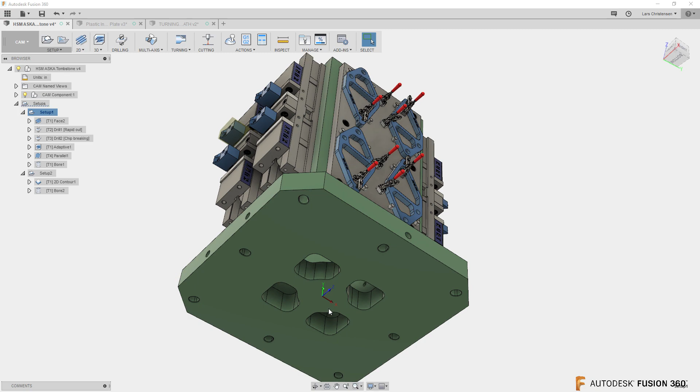The way I programmed this one, if you're not familiar with it, you didn't see the live stream, is I have a setup - you should always have a setup - but notice my setup is sitting down here right at the center of rotation, and on a horizontal machine your Y is up, and your X and Z are pointing in the Z direction toward your 0 side on a horizontal machine. This is actually the way I used to program my horizontal machining centers - well, not mine, but when I worked at a manufacturing facility in Rochester. It just makes it a lot easier to have your G54 sitting right in the center of rotation.

Of course, it comes with the caveat that everything on the tombstones has to be right in place. But that's one of the great things about having something like Fusion, where you can model everything up. So the way it works...

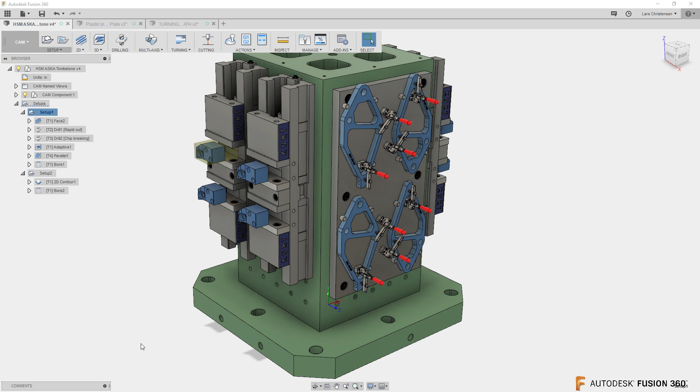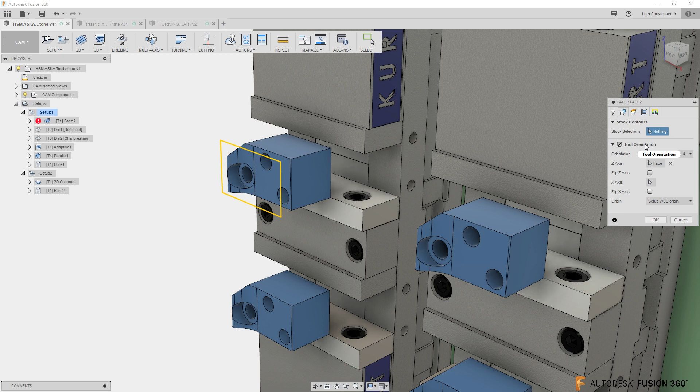You have one G54 sitting at center rotation, but then with this new tool orientation - we've had this for milling and drilling, so that's not new. That's actually how, if you go in and look here, I programmed one part, you'll see there's a facing operation. If you right click on that facing operation and go to the geometry tab, you will see the tool orientation is turned on. Same thing if I go to an adaptive to rough it out, edit, go to geometry tab, tool orientation - that's how you control which side of the tombstone you're going to be machining on. So we can now do that for probing.

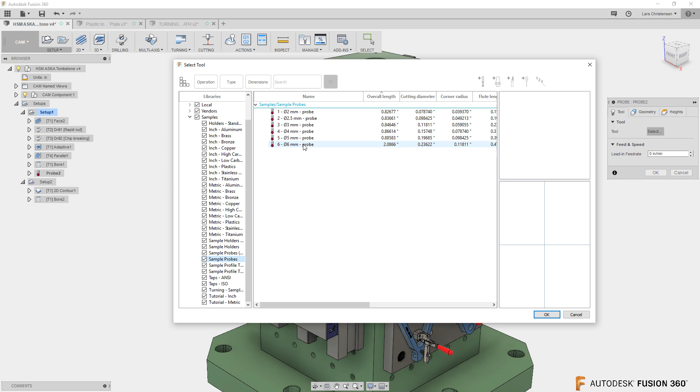So go into probing, select a probe, and I'm just going to go down here and select the one out of the library here, out of the metric library. Select that one, go to your geometry tab, turn on tool orientation, and that will give you the triad down here, right, for your work coordinate system.

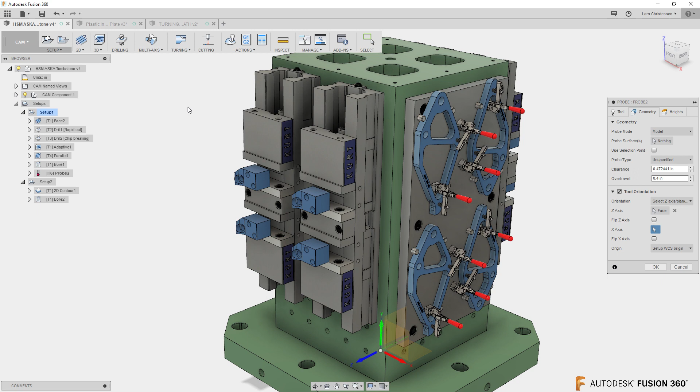And then you can just go up and use it just like you would do, select this face, and now you will see that the z-axis had flipped to this as its 0 side, or whatever side you want to call it. And now I can go in and select the faces that I want to probe, hit OK. Probing normally comes first. In case you didn't know that, you can actually drag operations in here also inside of CAM.

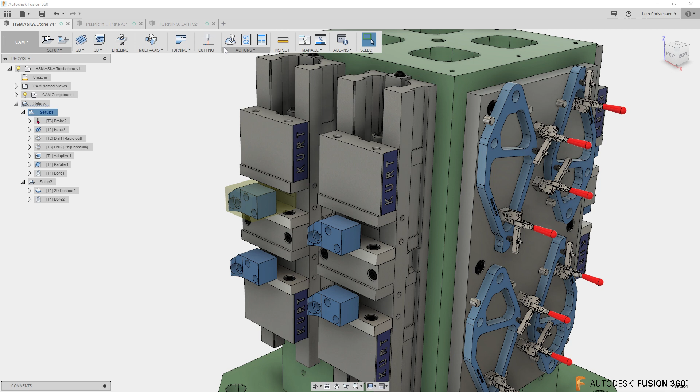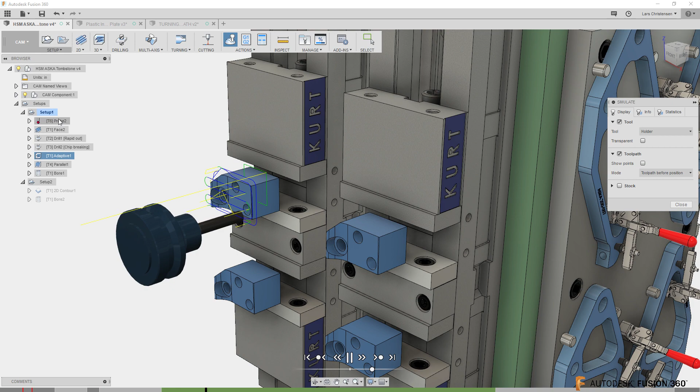So if I go in to simulate this now, hit the simulate button, slow it down a little bit. You can see now the probing cycle will come in here and probe the part and set the G54. We have done live streams on the whole setting G54 with the probing before, so I'm not going to go that deep into that. But that's how you would use that function. So either on a fourth or on a fifth axis machine, you can now use that probe to go in and do that.

Cool. The next thing, let's get over to this model here we've been using for a couple of these What's News. The next thing I want to show you is adaptive clearing. They added what is called both ways for this.

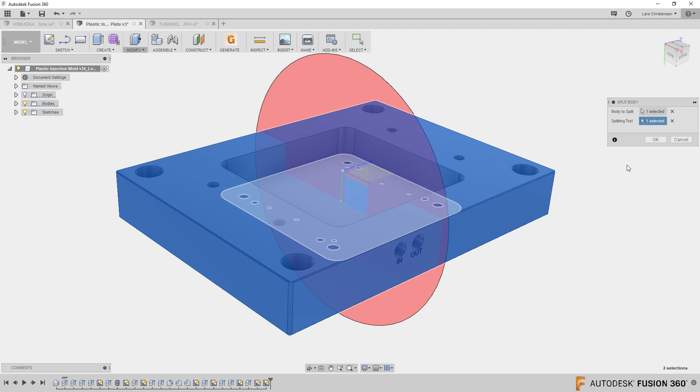But to show it, I'm actually going to do something else. I'm going to be in the model environment. I just thought I would show you this. How do you chop a part in half? Well, if you go into modify, you go into split body, and you select the body, and then you go down to splitting tool. You can actually select the plane, do that, and then you can hide the body. I want the other body. That body. And you just chop the part in half. How about that? So let's talk about CAM.

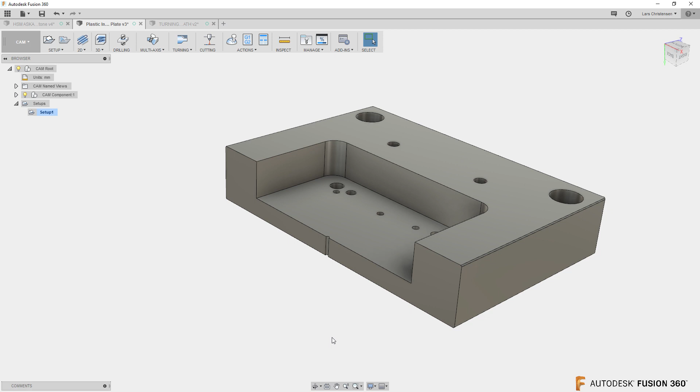Go into the CAM. Let's do a setup. We'll flip it the other way. Doesn't really matter. So in the adaptive, see, I wanted to show this open. So if we go in, and this works both for 2D adaptive and 3D adaptive. If you go into adaptive clearing, and I'm just going to go in and select the standard.

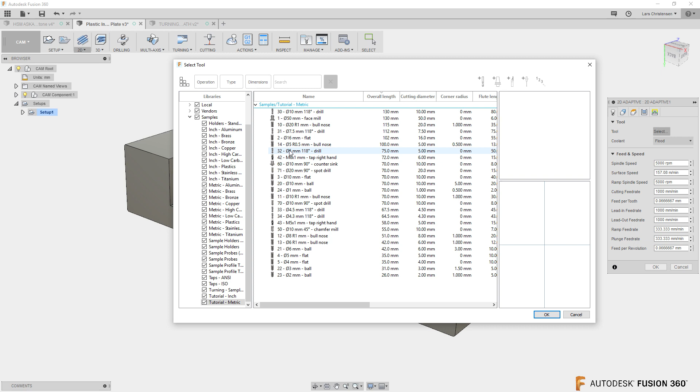Wow, metric. Something got moved up and down on all my tools. Where is it? 16 millimeters. There you go. 16 millimeter flat, the big rougher in here with the extremely long flute length. Doesn't matter. Couple of things.

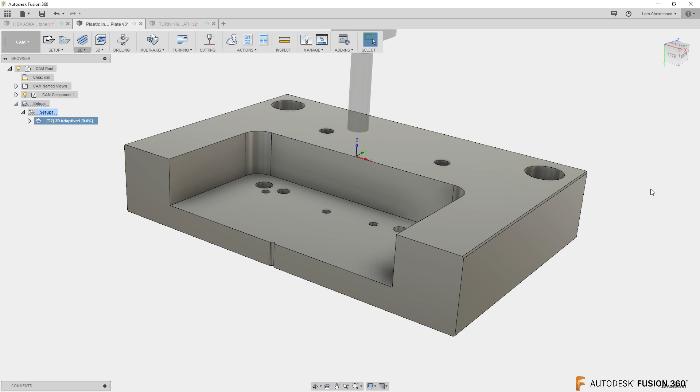When you pick adaptive, make it a habit of selecting the edge and not the face. And the reason for that is if you're selecting the face, then that's what it tries to machine. If I go ahead and hit OK here, it will do adaptive on that face. And you will actually see that it does a couple of weird swirls here because we have some holes in it. So make sure when you do adaptive that you always, unless you're doing a facing with it, select an edge.

Then you will see that you get what you want, really, in there. And then it also knows that it's got to start from the outside. Before I get into the back and forth here, one thing you will see here, if I go ahead and simulate this right now, the cutter will come down, it will climb mill, lift up, come over, and it will climb mill again.

Now, we talked about adaptive multiple times in the live streams. It is absolutely the best way to remove material inside of Fusion. What the software does in the background is that it calculates, it knows what the stock is, it knows the boundaries you're going to machine, and it will keep a constant cutting width on that cutter under every circumstance. So not only can you remove a lot of material, but it will also save your cutter life.

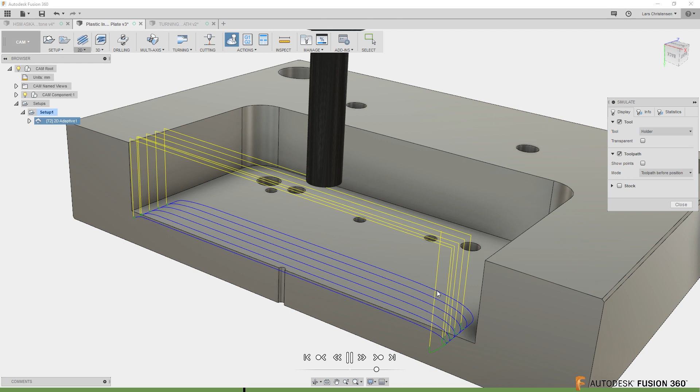Now, the reason I just quickly want to show this is so climb milling in CNC milling is kind of like just the golden rule, versus if you ever do like Bridgeport, like standard milling where you are cranking the handle, we normally go conventional, and this is how the cutter is spinning around.

Now, one of the comments that I get from people is that it's all great, you know, climb milling is the way, but look how the cutter lifts up every time. That's a lot of rapid moves to move up. And I will tell you that I did a lot of production machining back in the day, and yes, rapid moves cost a lot of money. I know that if you're just machining a couple of parts, then a little bit of rapid move doesn't really matter. But if you're doing production, then rapid moves are critical. So this is where this whole thing comes in.

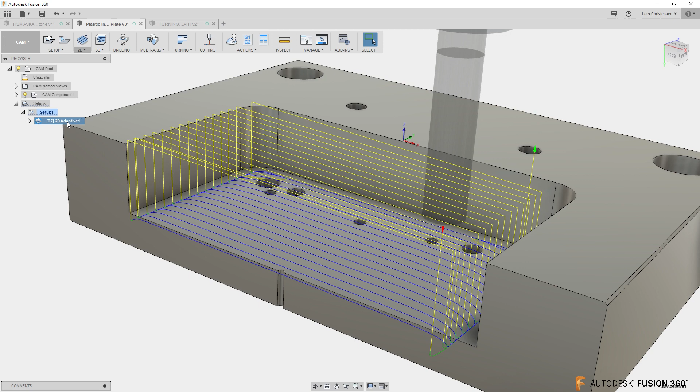But before we get to the going back and forth, I want to show you how you eliminate those high lifts, because many times people ask me that. Right click and go into the operation. Go into your linking tab. That's the last tab. That has everything to do with what the cutter is going to do between when it's engaged in material and rapiding to the next cut. And what I normally do in here is there's really three things I change.

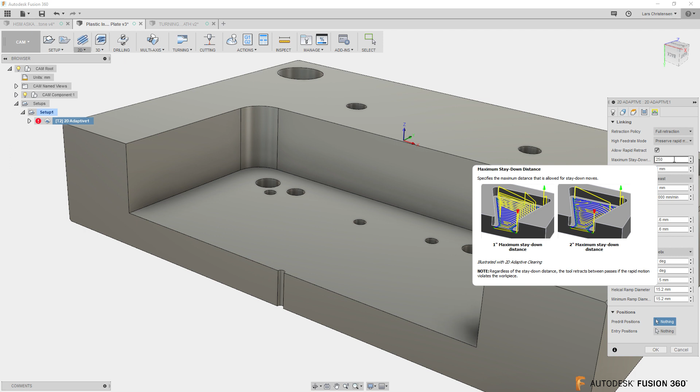Set the maximum stay down to a higher value, and this I think can be a little confusing, but you know, they put some good help menus here. If you hover over it, it comes up on the screen. So the bigger you make this distance, you're telling the software that it can stay down. So if you make this 250 millimeters instead of 80 millimeters, then if I hit OK, you will now see that we don't get any of those rapid moves.

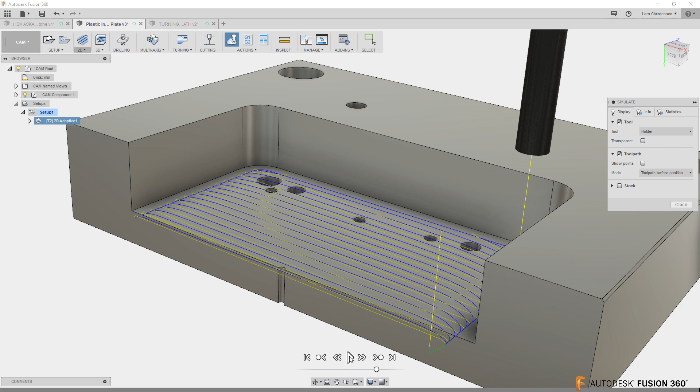Now, another thing I normally change in here is I normally add a little bit of lift height, because you normally want the cutter to go up just a little bit, right? You don't want it to drag around the floor. And now when I simulate this, you will see that it's still climb milling, but it will lift up 2 millimeters, then it will go down again and lift up 2 millimeters. You can kind of see if I zoom in, that area there is where the cutter is going to lift up to that 2 millimeters. So here it comes. And it's going to lift up 2 millimeters and go back there again.

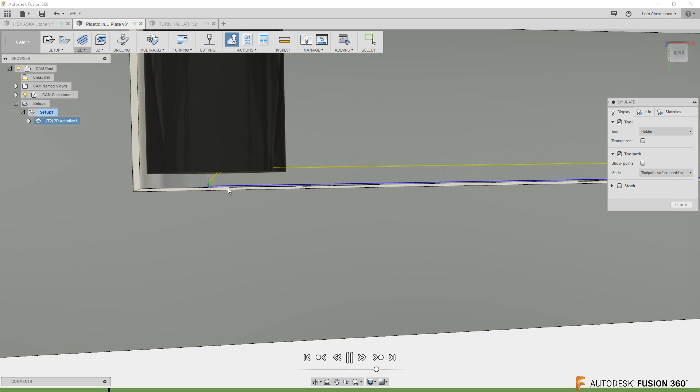So I hope this adds a little bit of value to somebody out there. Okay, so this was not new. What they have added is an option where in the passes tab, you can now say you want to go both ways. But notice, this whole adaptive clearing is controlled by this optimal load. So this is how thick of a side milling chip your machine can take. And this depends on what type of machine you have. So it's not like one golden rule. So just be kind of aware of that.

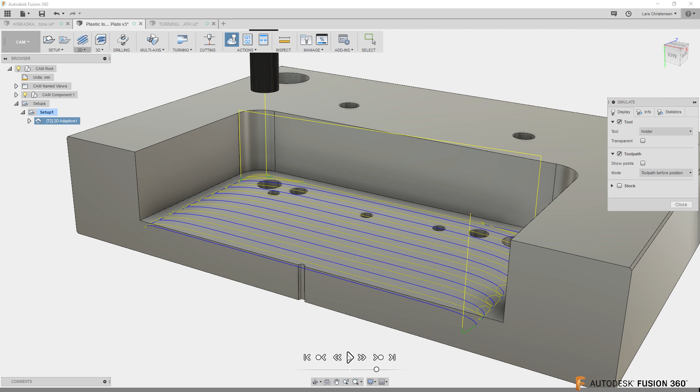But what I want to show you is if I check this both ways, I get another one. So I get an optimal load here, and you get an optimal load the other way. Because what the software is going to do now is it actually is going to climb and conventional mill. So it's going to climb, that's all great. Conventional milling. Climb, conventional milling, okay? So now you're getting that force.

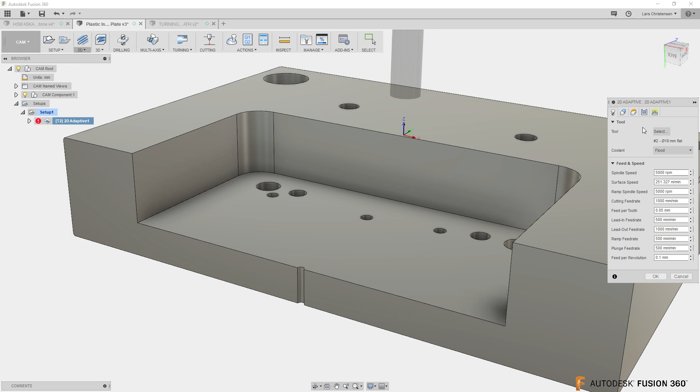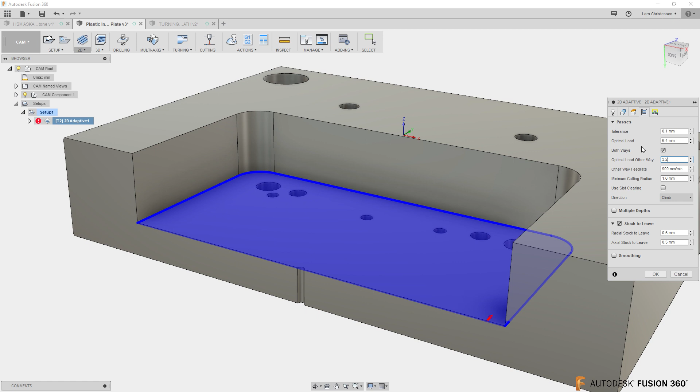But if you're machining like steel, you definitely can test it out. It depends on how hard your material is, but I would definitely think that your conventional milling has to be quite a bit lower. So you cannot take the same amount conventional as you can climbing, and you can hear it for sure as you're going back and forth. I personally would probably start out with something like half of that, and then play around with it. But if you've got to remove a lot of material, like in 6061 aluminum, this function here will definitely save you some time.

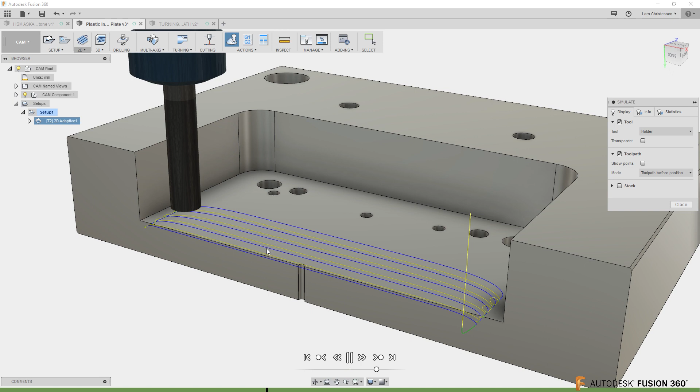And I would also think that, especially if you're doing something like 6061, you will find the cutter is going to last pretty good. Definitely if you're doing roughing. This is just one of these add-ons from the development team that is productivity, right? And something that I think is absolutely awesome. So this was a good one that they worked on for this.

Another thing that I'm a huge fan of is a couple of things they did to the tool library.

So I'm going to the tool library now. The tool library has gotten quite a few updates. Let's see if there's one. This one has a little bit more tools. They have done a good job trying to clean up and do different things in here, adding a little bit of logic to it. This time around, if you look here, we have a bunch of tools, and you can drag over here, and there's a lot of different things in here.

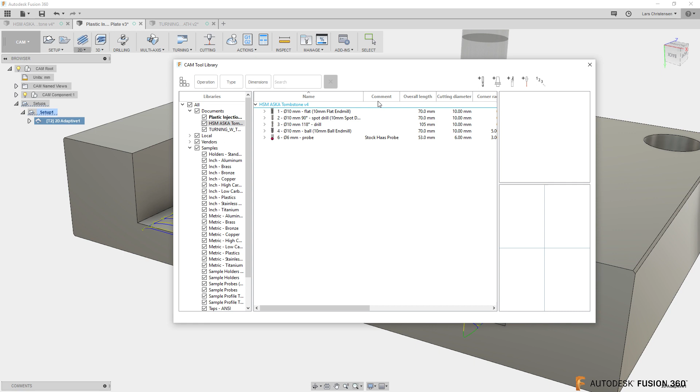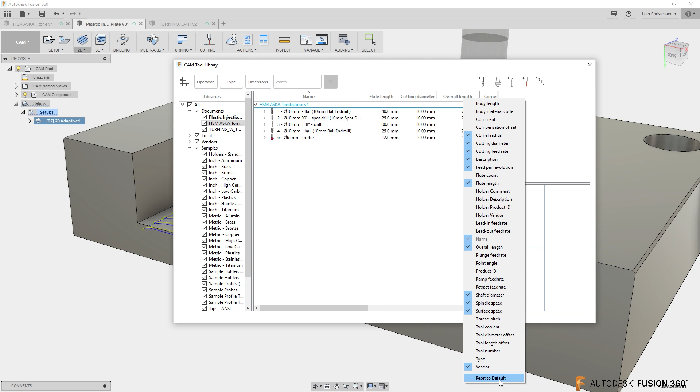So now you can turn that on, and you can also drag them and reorder them. So I would definitely have comments next to the name, and then I would have my personal comment in here on what it is. So right-click in here and you can turn things on and off, and you can also reset it to default. Then you can grab things and reorder them depending on what you want. So that was definitely another very good thing. All right.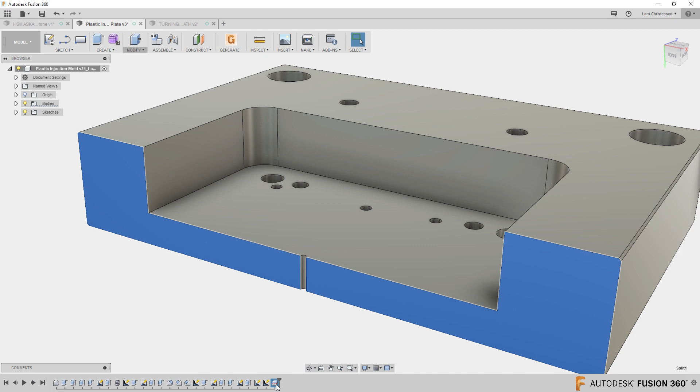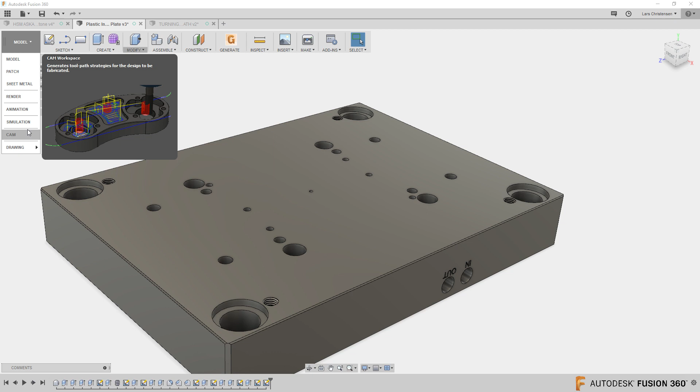Let me delete this setup for a second. Let's get back to the model environment, and let me undo what I did with splitting this one apart here. Okay. The other thing that they worked on was holes and hole drilling, and it's actually kind of funny because I just had a guy give me a note that whenever I'm doing something in CAM and I get to drilling, I always rush over it, and I should stop doing that. And he's right. The funny thing is, I used to do a lot of hole drilling, and it used to be one of those things that I always played around with.

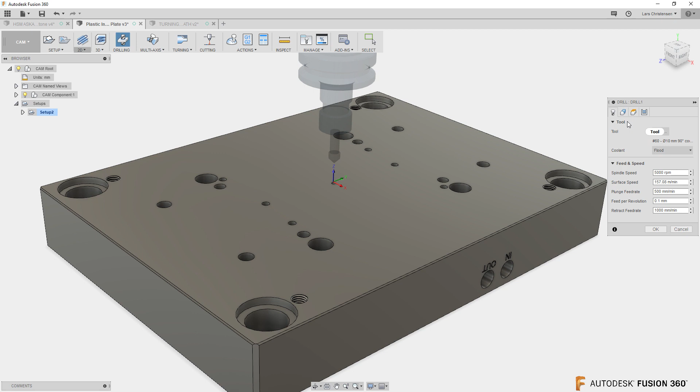So let me do a new setup here, and let's talk about the drilling. I think my tendency is because holes are boring, but if you're drilling a lot of them, they are not. They did some really good enhancements in here. So let's go ahead and do a drilling. I'm just going to select a tool. Countersink will be fine. This interface got some really nice stuff.

First off, let's select a hole. Select the face here, and we can do select same diameter. Click on that, and it will find all those different diameters. And you can select other faces, and they will be added in there. Now here's something pretty neat. Look down here in the lower right corner.

Well, you can't look at that because I put a logo there. Hang on. My logo is right in the way. Oh, that is a rookie mistake. I thought it was going to be all fancy with a logo down in the corner, then you can't see.

Down here, you can see that we have 10 holes selected. If I select another one, now it changes to 14. So it's pretty neat that they have added a hole count down here. I have definitely had a drawing that said drill 32 holes, and you were sitting in here selecting, and you had to count that you actually had 32 and make sure you didn't miss one. So good job there to the development team.

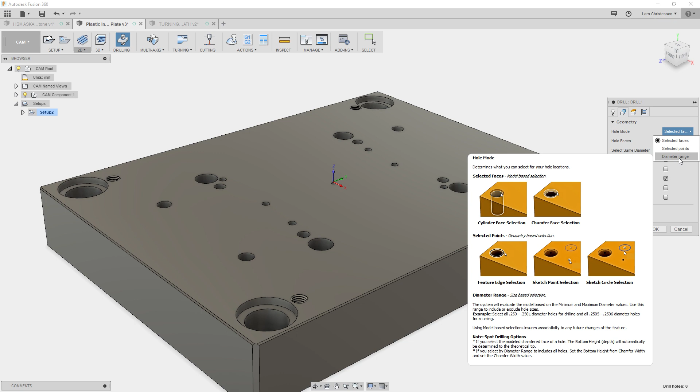Another one I really like is diameter range. When I hover over here, you get the flyout menu that Mike Matera does such a good job with. I always read these. So it's diameter range. This is brilliant. If you know the holes you've got to pick, and we're spotting right now, and you were spot drilling every hole here, you would have to go around and click all of them. Now you can just go into the diameter range and do that. I think that is absolutely awesome. The other thing that they have added in here is select by points.

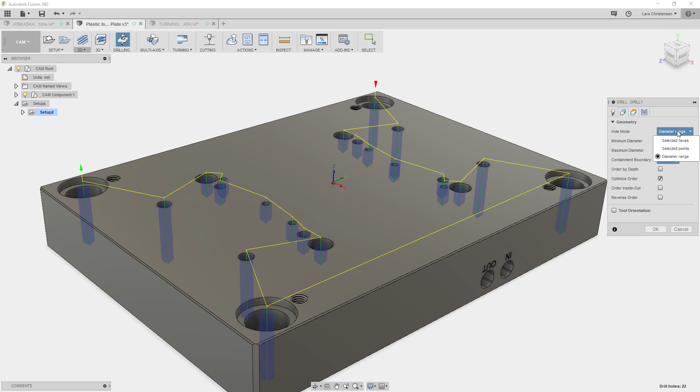Now this is not new, that you can select by points, but what I did here was, if some people have to model a lot of holes, like you get a plate that has a couple of hundred holes in it, or 500 holes or something like that, you know that all these holes can tear down on your CPU power on your computer.

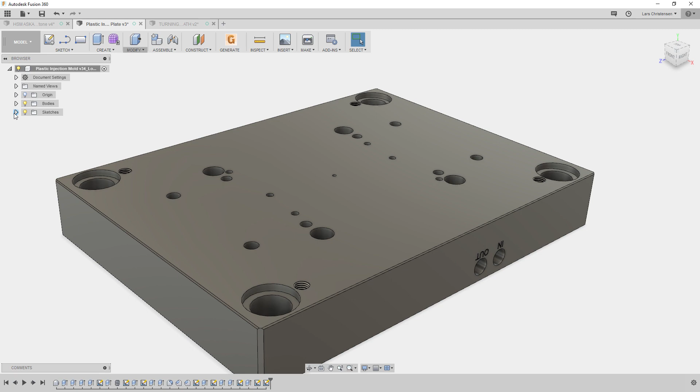So what you can do is that you can create sketches, right? So here is a bunch of sketch diameters. Now I could extrude all these down to the right depth, and there's not that many right here, but if you have a lot of holes, that can slow down your computer. So what the CAM team did was they let you now, let's go back into that drill, they let you now use the select points.

And if I select one of these diameters, I can still use select same diameter. So now the algorithm is done in here. It's absolutely brilliant that by selecting a point, it even knows the sketch diameter, and you can now select all those. So there's some people who are going to be really happy about that.

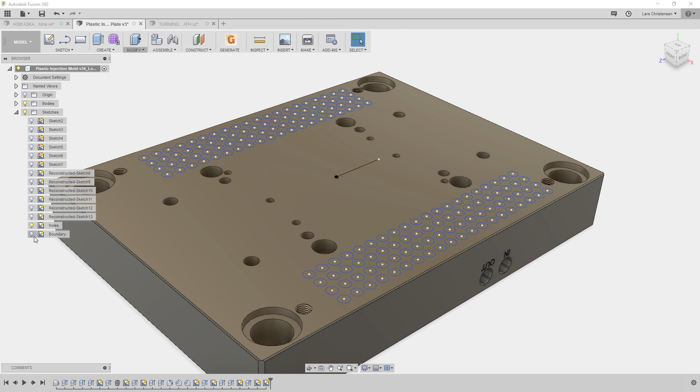Now another thing that they have added in is that you can now use a boundary. Let me go back to our model here. I used a sketch. It doesn't have to be a sketch. I just created a rectangle, right? A sketch rectangle, but it could be a pocket or something like that. But what is really great about this, especially if you have big plates where you can't reach all the holes. We've all tried this, where we can only reach half of the part.

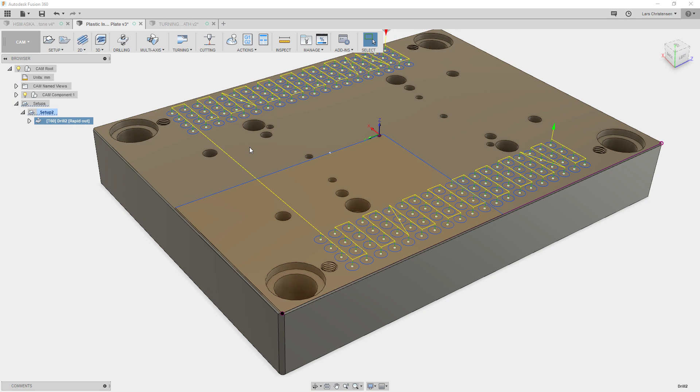You could cut it in half like I did in the beginning, but of course the CAM team, those developers, added a containment boundary right here. So I can click on that, I can select my edge, and now you will see it only selected the holes within that. That is really awesome.

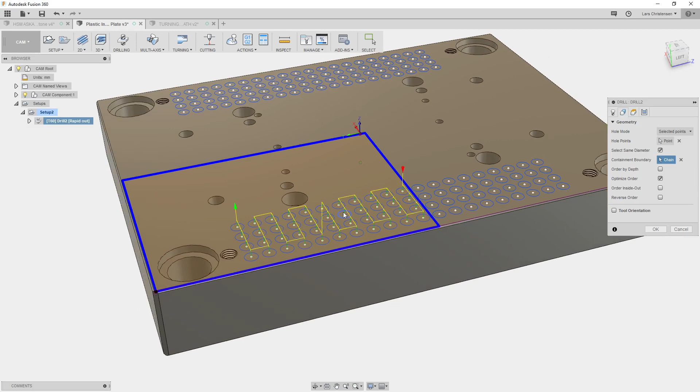Another thing that I believe was in the last release that I talked about, but now I'm in here. Also remember that you can now sort the holes by depth. So you actually can now select different depth and control all that. There's also now a reverse order in here. You can check that, and you're now reversing the order that you are going in. That can be extremely nice.

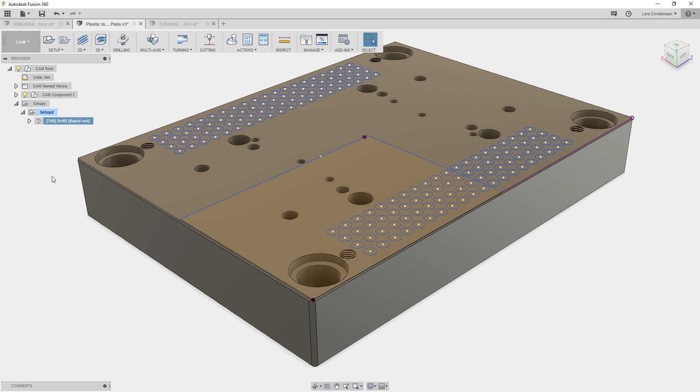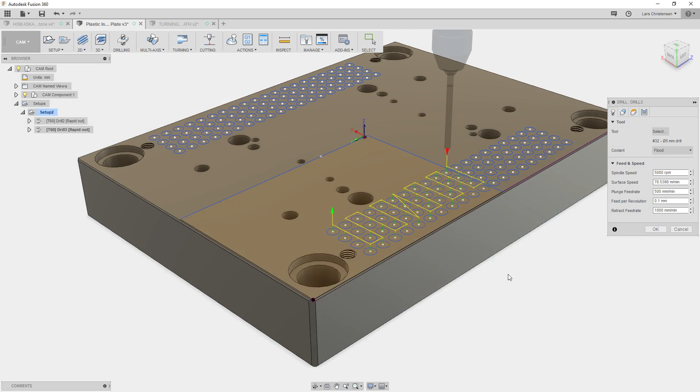If we right now are spot drilling all these holes, and now we actually want to go ahead and drill them, then we can right click and say we want to do a create derived drilling operation. Select a drill instead of the spot drill, right? I don't know what size these holes are. And then you could go into here. Now you could reverse the order if you had that option.

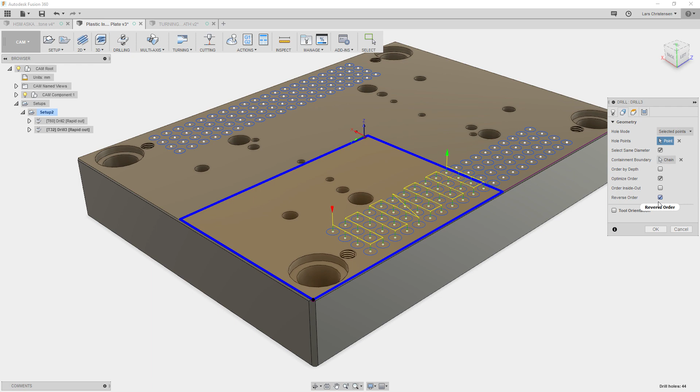It kind of depends. I mean, that could be great depending on how your machine handles tool changes. Some machines, the head's got to move up to get to the tool change, but other machines you actually don't have to do that. So this little reverse order here is absolutely awesome. So the drilling function here got some pretty cool features with this hole diameter range. You can select these points, the selected diameter in there. Yeah, so really good job on that to those guys.

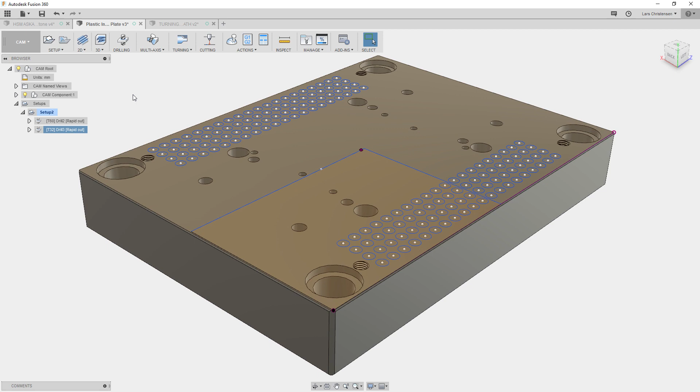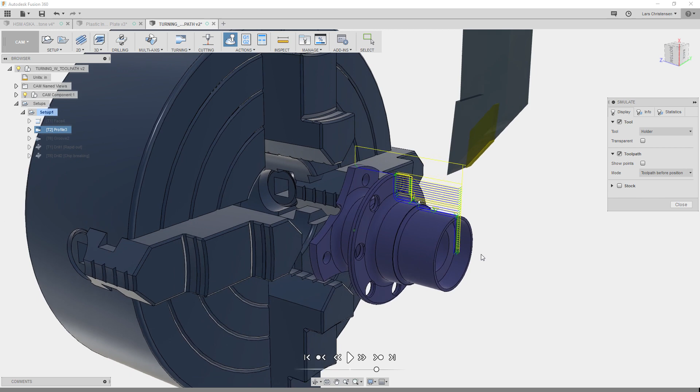The last thing we're going to talk about is turning. Well, the second last thing. Turning here, they added a couple of things. One thing that they added, what I thought was kind of interesting, is if you have a profile cut. So I'll just go in here and simulate this profile cut here. A standard profile cut. Now you can actually right click and you can turn on use pecking. So if you click pecking here, you can now control the pecking depth and retract.

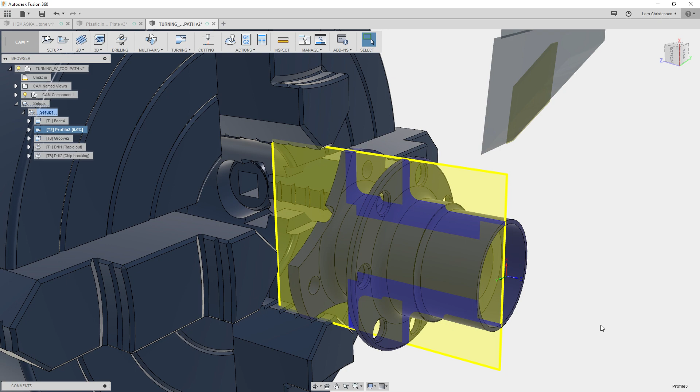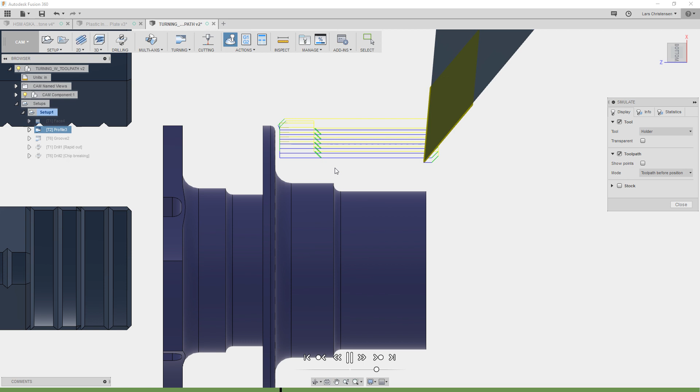And I thought it was funny because I've never seen that before. Now I'm not the lathe wizard either. I've never seen pecking on CNC turning before, but running manual mills, I have definitely done that by hand, so you don't get those long stringy chips. You're just standing there on the handle and you kind of peck as you're going. So that was a very good enhancement.

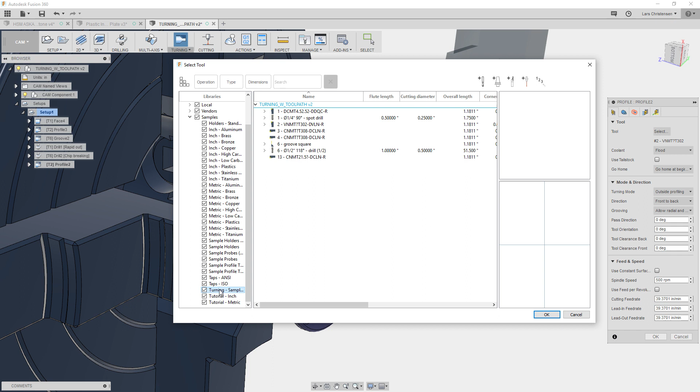The other thing that was added in here, talking about turning, is I think it's Sandvik who have created some new turning inserts that will actually let you machine both directions, so not just coming in from the front to the back. So what they did was they added that. So if we go in here and say turning, and still we select the turning profile. Now I need to read up a little bit on this, but if we go into the turning sample and select something.

Wait a minute, something like this fella here, where you can kind of go both ways. So be aware that you can do from back to front here. You can actually go in both directions, back to front as well.

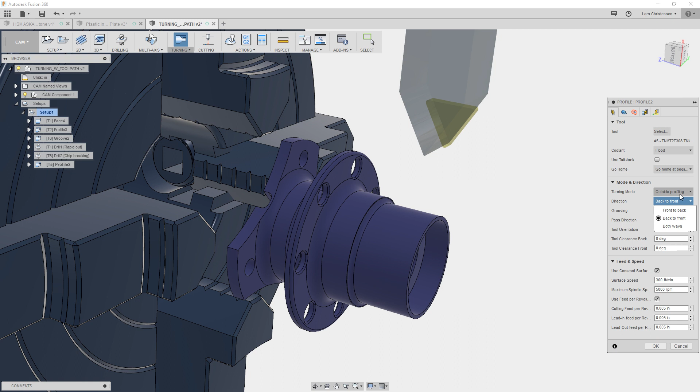I wanted to show, in case you haven't done turning in a while, that they changed the geometry selection. This is actually pretty neat. Now you're selecting the boundaries almost like planes, like we do in milling. Really makes it kind of nice. You have all the options in here, so we can select a boundary area like this.

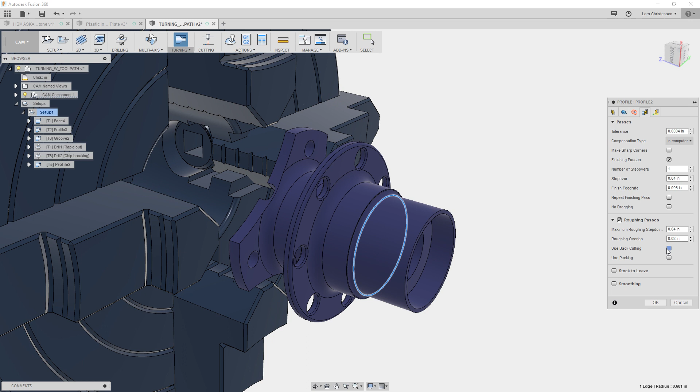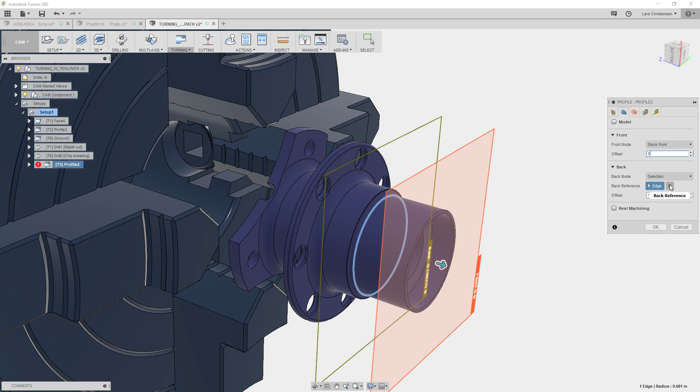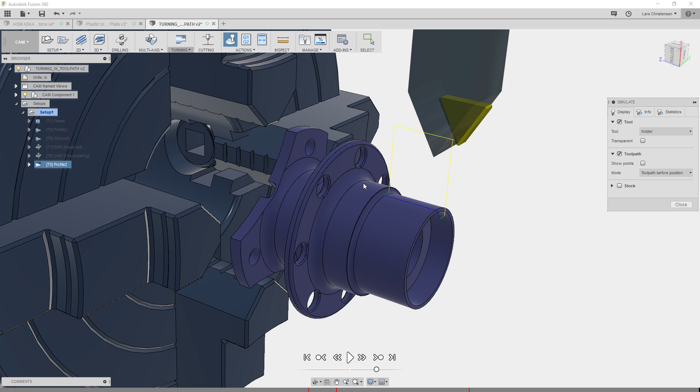And down here you can use back cutting now. If you select back cutting, you will see that this tool path, well, I set the boundary to be... let's go back into the front here. Select that it's there, hit OK. I probably have some rapid or roughing toolpath on, let's turn those off. You will now see that it will go and machine the other direction, from back to front. I'm pretty sure it's called prime turning, and I believe it's Sandvik who makes these inserts. Pretty cool that they incorporated that into this.

The other thing they added in here that is super cool is if you go into your tool library and create a turning insert, now on the shape, if you scroll down to the bottom, I thought you did.

No? Dun, dun, dun, dun. Why don't I have a... maybe not. Turn tool, insert, diamond, diamond, triangle. Oh, that's interesting. I thought we had a new custom option. Oh, we do have a custom in here for... yeah, but I thought we had a custom in here too. All right, I've got to look back into that and get back to you.

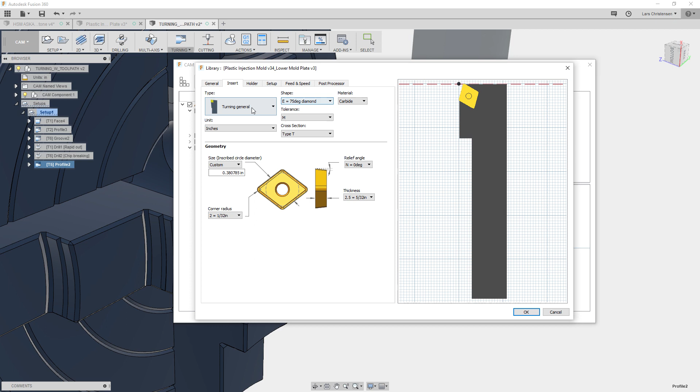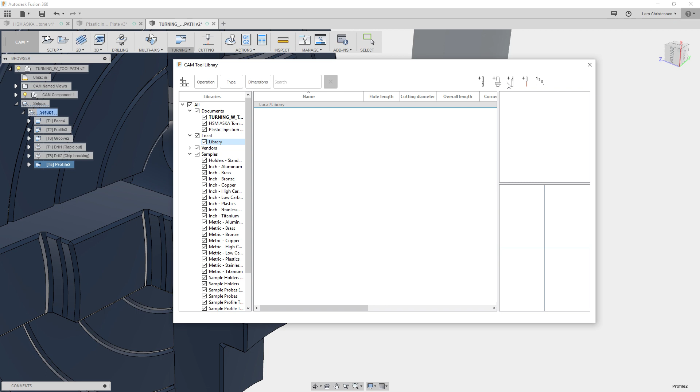I am not quite sure how that is. I see custom over here. I think we always had this, turning general. Yeah, all right. Talking about not doing my homework, eh? I don't see it in there. That is probably, it should be in there. Might be something on my end, that wouldn't surprise me. So I go into the local library. Okay, I've got to do some more homework. Ha! Okay, moving on. You were supposed to do insert and holders, but I'm probably doing something wrong.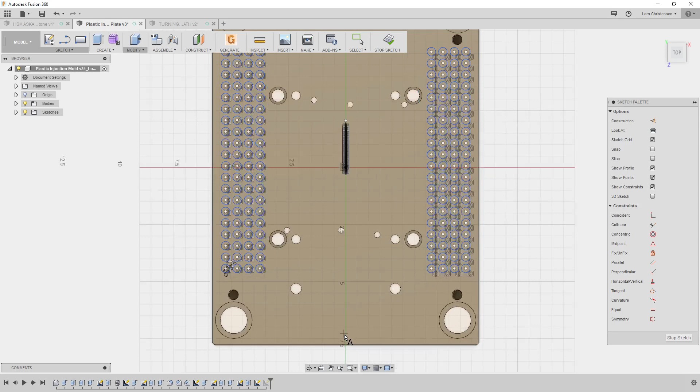Last thing I wanted to show, and I showed this yesterday, but just in case you didn't see this on the live stream - we now have, because a lot of people asked for it, stick font as text. So if you click on text and click on the face here, we now have Fusion 360. If you go into the font, we now have Simplex, a standard stick font in here.

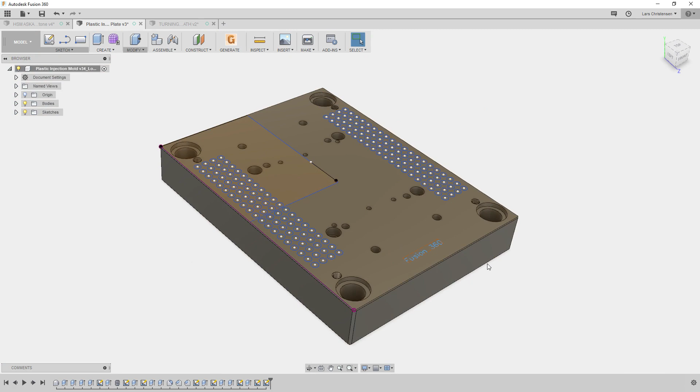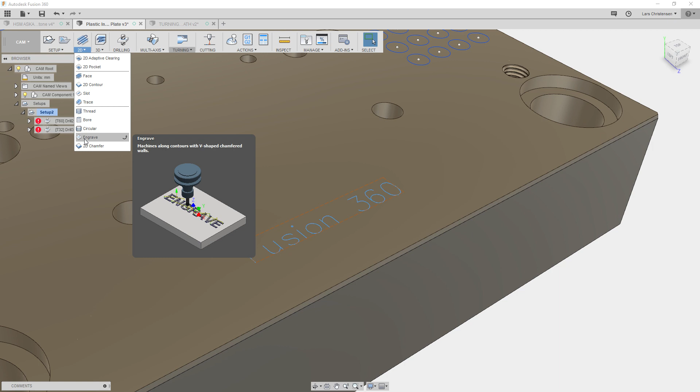So that's sketch. Now we have standard stick font, and the team actually did the engraving feature in here that will do a really nice job with any type of Windows font. But of course, a lot of us old timers still like to do a stick font. I think it's kind of standard in CNC milling. And you will use the trace function to drive that.

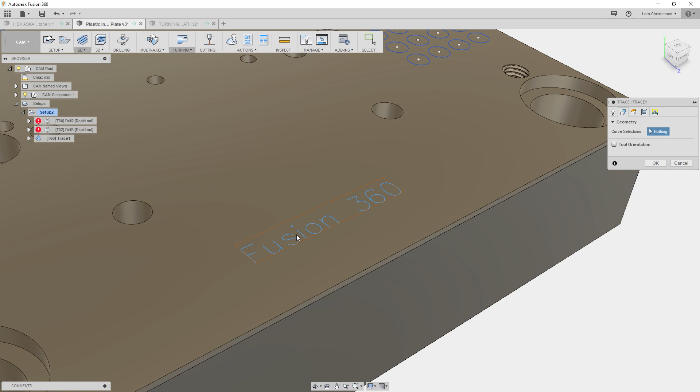So if I select the trace function here, select some kind of tool, maybe to do your countersink here, you can now select that text. You should be able to select the text - you can select that text, and you can now use the trace function for that. That was found under 2D trace, use that one for that.